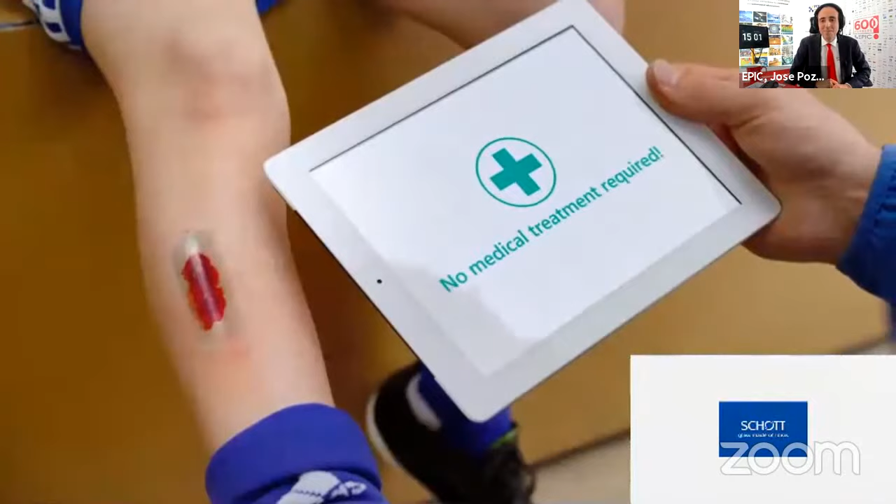With smart glass, you can collect information and display it where it's needed. All the new upcoming applications of glass have something in common: they have to be perfectly smooth, scratch-proof, and with added functionality to detect your fingerprints or send something through it. So we need to manipulate glass.

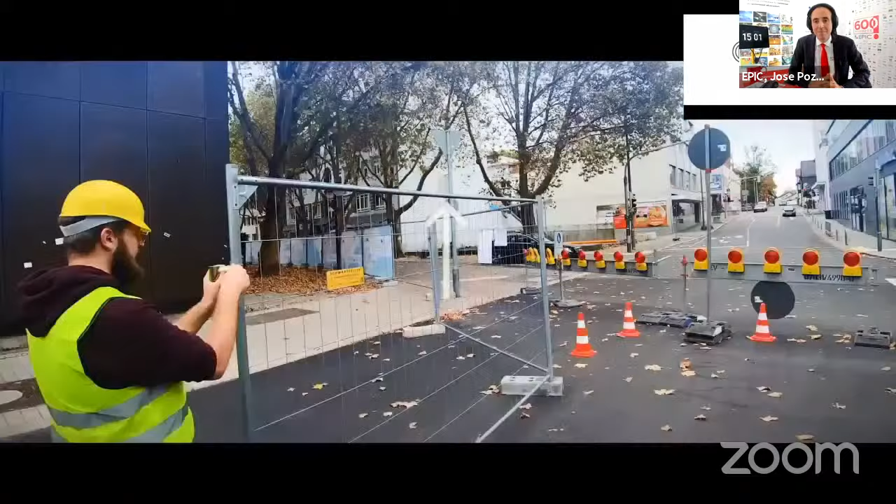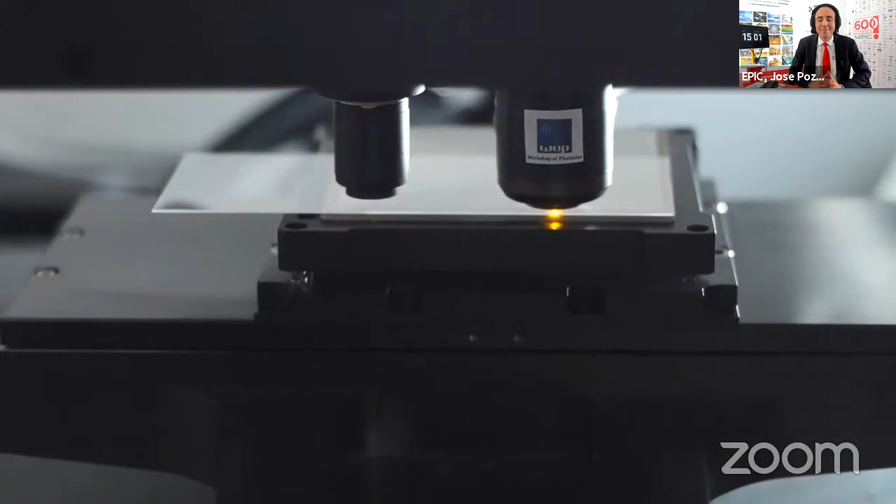Many industrial applications require joining glass to other materials like silicon, and that's where the specialized talents of EPIC members come in. Take Workshop of Photonics in Lithuania. They use ultra-fast femtosecond and picosecond lasers combined with extremely accurate optics to cut Corning glass. The high-end watch industry has chosen sapphire crystal as the material of choice. Sapphire can only be scratched by diamond, but producing and processing synthetic sapphires needs extremely accurate methods.

On October 12th, our Zoom room will bring together new and traditional end users of glass to discuss changing trends and new opportunities. I want leading companies in different application fields like Bosch, Swarovski, Huawei, Audi to interact with glass manufacturers like Corning or SCHOTT, and find opportunities for photonic companies including 4JET, Workshop of Photonics, OPTOMAN, Asphericon, Coherent or Ekspla. So let's explore business during our in-depth discussion on Monday, October 12th at precisely 3 p.m. Central European Time. And this time we promise not to scratch the surface.

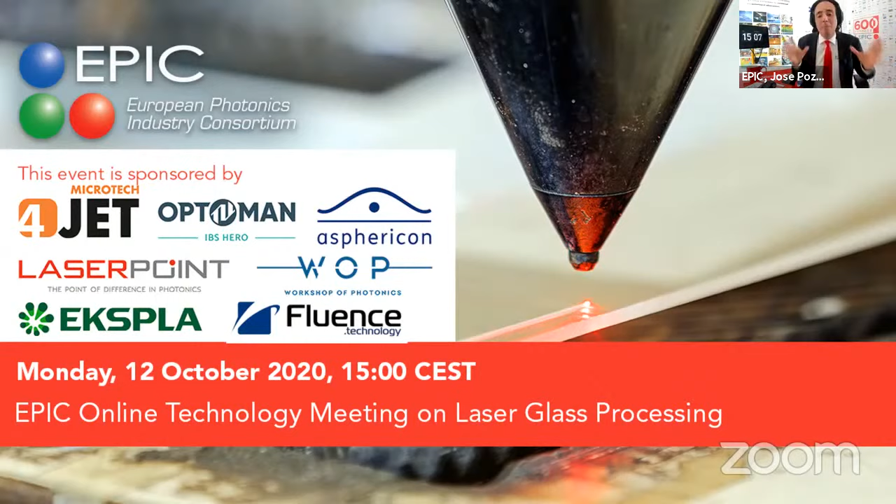But not only these people make me happy, the one that makes me the happiest is Dr. Francesca Moglia, who is gonna tell us what's gonna happen in the next 2 hours of your life. Francesca. Thank you very much, Jose, for the introduction.

So here you see, this is our agenda today. So we have a mixture of end users, system integrators, and also experts from the R&D side. But we prefer to see our agenda in this way, where not only the speakers are there, the official ones, but also all of you that are there. And so we heard already a bit about the sponsors that are also here, mostly coming from the manufacturing side, so from the supply chain. But we have also many end users.

So here on the top left, you can see we have different end users from different applications that are really looking forward to listen to what solutions we can give in laser glass processing. We have for them a lot of system integrators and experts in processing systems. If I read all through, it will take really long. So it's really nice that you are all here, we have really many experts today, and some of them are speakers. But if you're not a speaker, please raise your hand if you have some questions that we can talk about.

And then, of course, it's a laser glass event, so we cannot miss the glass manufacturers. So it's really nice to have here today 4 of them, some Epic members, some not Epic members. So it's nice to welcome new and old friends. And then, of course, the supply chain wants to listen to all of you. And so there are laser system engineering experts, optics, optomechanical beam shaping system providers, machines for glass, packaging experts, and also the laser glass processing of the future, as I like to call it. So research and development in this field, also many participants today from this.

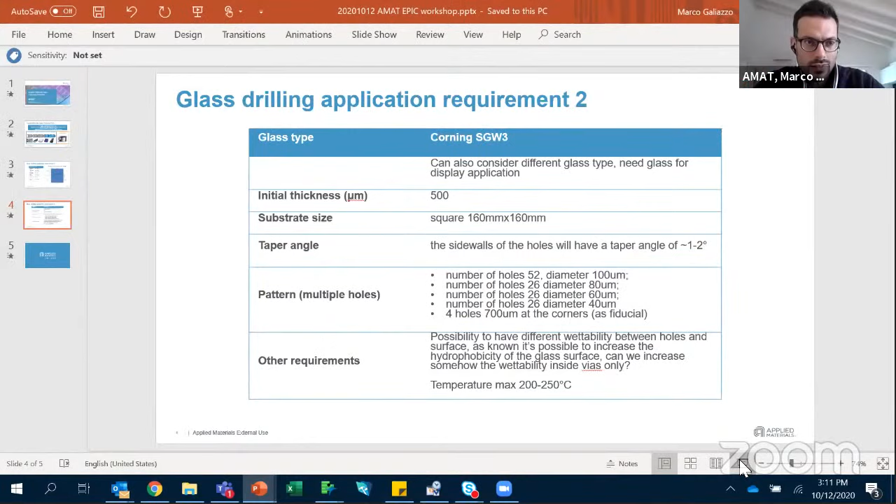What's it all about? So who am I? I'm R&D manager at Applied Materials Italia. We're based very close to Venice, so also a nice location if you want to come and visit, after COVID of course, you're always welcome to a very nice part of Italy. And I'm talking here as R&D manager. So I lead basically the R&D development for this company. It's a fairly old company.

Baccini was established in 1967, and he was a pioneer for automatic screen printing lines for microelectronics and PV. It was first in Europe to propose the technology, and his vision allowed basically to start a full industry in Europe. In 2008, this company, which back then had quite an impressive growth, was acquired by Applied Materials, based in Santa Clara, a NASDAQ big semiconductor company. Maybe many of you know this group. So we became a branch of this big multinational company, and we were incorporated.

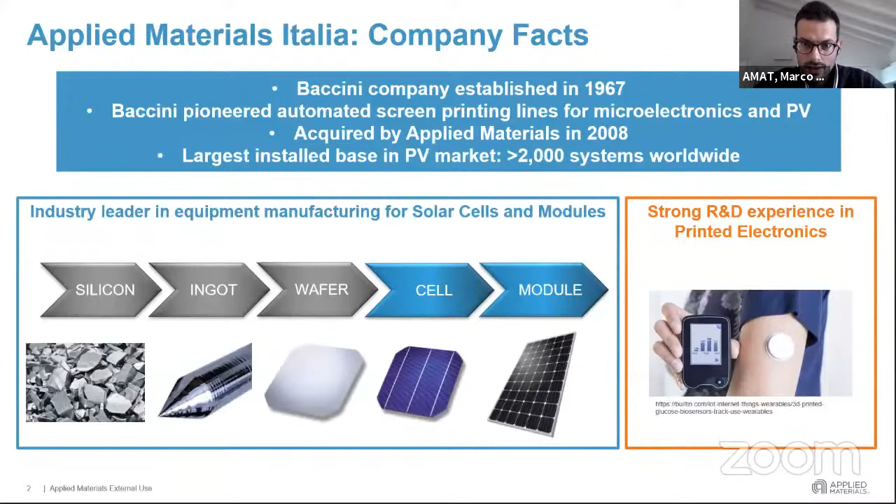So I came here with a wish list, so I don't have too many answers for you. I have more questions. I have two relevant applications, and both of them have a customer behind. We are mostly looking at equipment, so integration of laser into a full system, but customers come to us with requirements related to the final device or product. This is the first one, put in quite general terms so you can get a basic understanding of the process. We're looking at substrates up to A4 size, so maximum 300 millimeters by 200 millimeters. The thickness ranges from 500 microns to 1 millimeter. The via diameter for this specific application can be as low as 40 microns and can go up to 100 microns.

So the aspect ratio ultimately can go as high as 10, that is the thickness to diameter ratio. With the via distance, that can be from 100 to 300 microns. So this is an example of the pattern, and this normally would go all around the substrate, basically on the four sides, and this is related to some advanced display technology that big companies are now looking at. So it all adds up to around 3,300 vias.

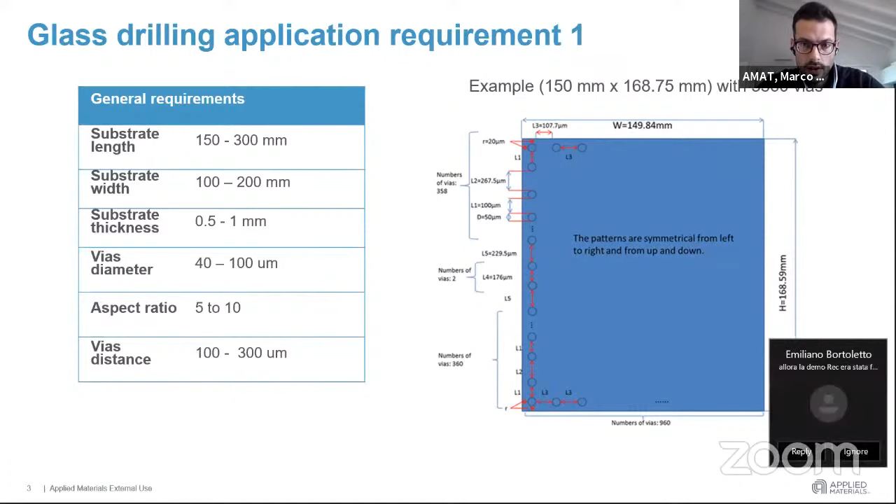I would say that for this kind of application, being still in an exploratory phase, we don't yet have tight requirements in terms of cycle time or machine throughput. So it's more of an R&D phase, and people now want to understand the highest quality they can achieve to build this device.

Okay. Another application: here we also have a specific glass we are basically targeting. This is the model, a Corning SGW3. Ideally, we are also flexible and open to different kinds of glass, but with similar requirements. Here, the thickness is set at 500 microns, and the substrate size is basically 16 by 16 centimeters. Here, the requirement on the taper is quite tight because the maximum taper should be between 1 and 2 degrees.

And this is a sample. We are currently doing some sampling for this customer. We have a specific layout of an array of holes with variable diameter. Pretty much the same requirements as before, plus, in this case, 4 holes at the corners with 700 microns. And here there is also an added requirement on our wish list, which is basically tweaking a little bit the surface behavior where we process with the laser. If we could ideally increase the wettability inside the vias, this could be a big breakthrough for this application, because we need to apply some materials inside these vias.

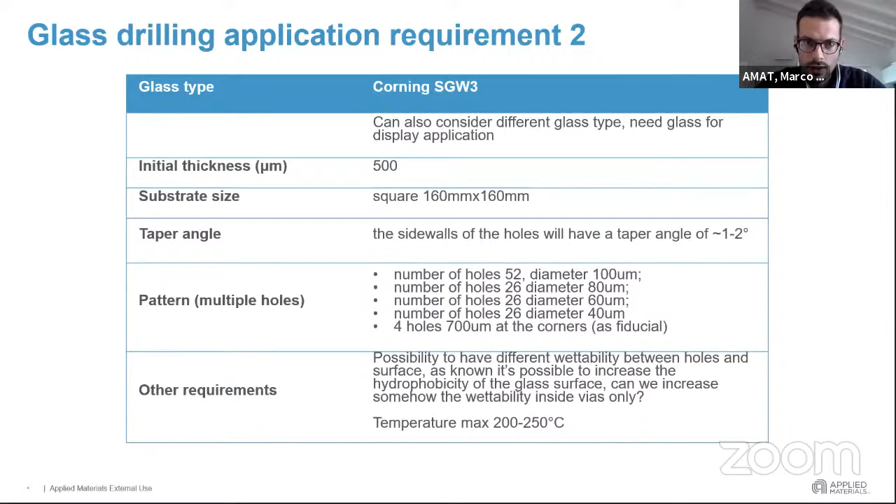And we have an additional requirement that also has to be met or understood. The full substrate should not go higher than 200 degrees C, because there are pre-deposited structures that can withstand only up to this temperature. I understand these can be fairly tight requirements, but I'm pretty impressed by the companies and names I saw in the audience, so I think somebody can knock at my door and help us in this journey. So thank you for your attention.

Thanks a lot, Marco. This is exactly what we like: specific data, specific information, specific requirements, so that our photonics experts from integrators and laser manufacturers can ask you something or go deeper into the request. I see now there is a question from Wilfried from SUSS MicroOptics. Wilfried, please open your microphone.

Hello, can you hear me? Yes, a bit quiet, but okay. Yes, I've had problems with my headset all day. Okay, but we can hear you. If we stay quiet, I shut up now. Okay. It's good.

So let me make a start and introduce myself and WaveOptics. We are a company designing and manufacturing two key components for augmented reality, namely diffractive waveguides and light engines. I'm senior manager responsible for waveguide development. A bit of the history of the company: we started trading in 2014. We're still a startup, but a large startup with 110 people. To date, we have raised in excess of 60 million.

And as I mentioned, we focused on manufacturing those two key components for AR headsets, which are AR lenses, augmented reality lenses, and small projectors, which we call light engines. So inside the company, we've got experts in different fields. We've got people specializing in modeling. We've got some in-house developed modeling tools. We've got manufacturing specialists, metrology specialists, and people focusing on the optical testing.

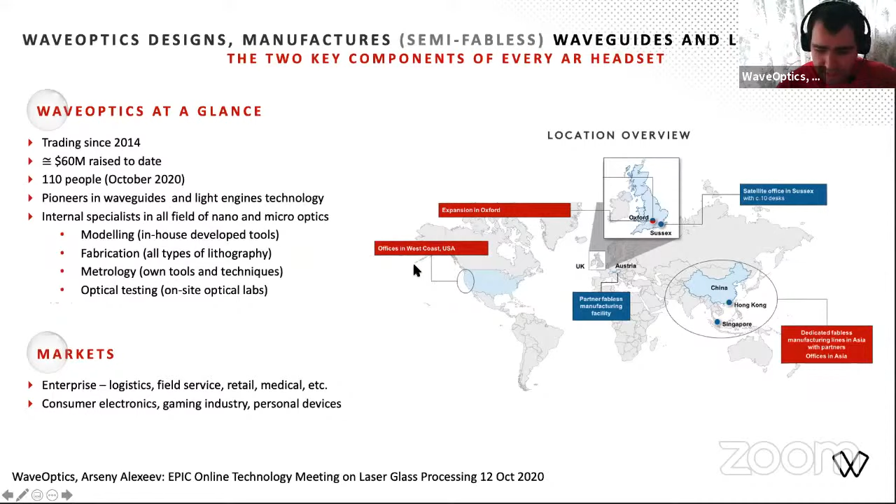And as you can see from this world map, our main headquarters are based in Oxford in the UK, but we've got business representatives around the whole world. So this slide shows our range of augmented reality lenses, AR displays. I'm probably not going to go much into details here, except to mention one thing, that we are producing 3 different products, and as you can notice here, they can be 1 plate, 2 plate, and 3 plates. This means that, for instance, for our 3-plate design, we've got 3 waveguides which are individually cut, and they are stacked together to form the final product.

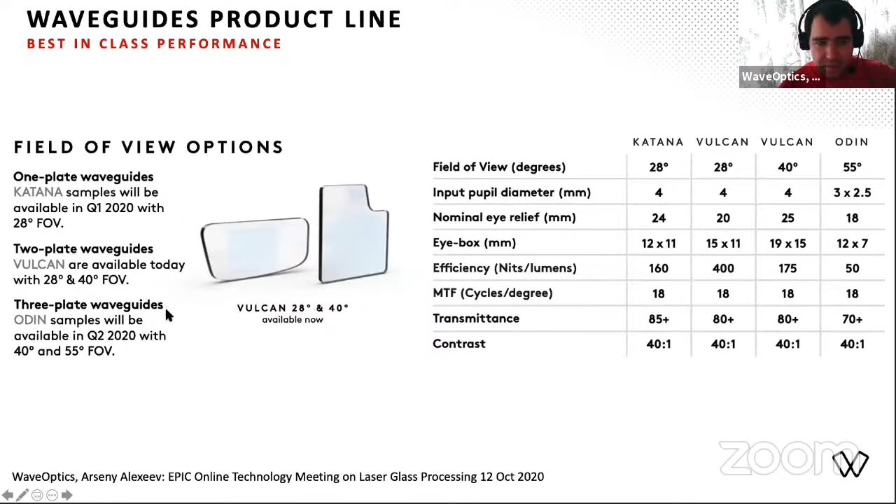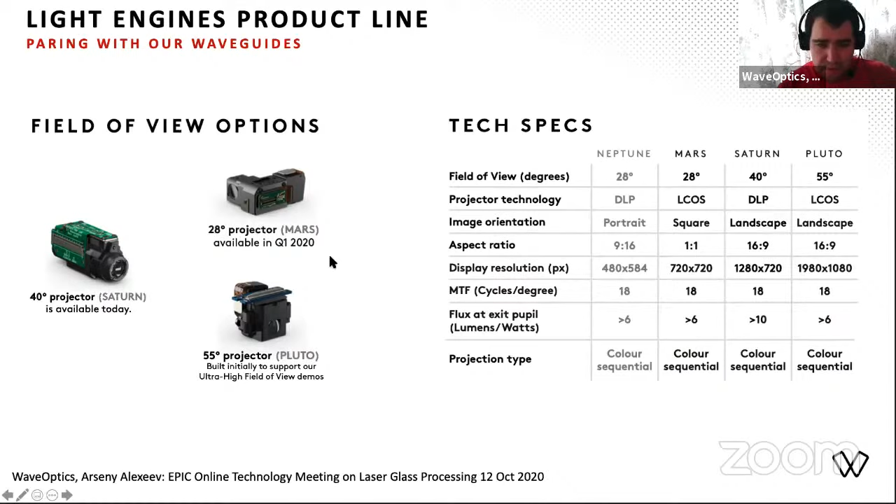So moving on to the next slide, this is a similar slide just showing the range of light engines, which are small projectors, which we're also manufacturing. This product is not that much relevant for this meeting, so I'm just going to skip this slide and move on. And on this slide, you can see our full manufacturing cycle, and I will spend a couple of minutes just discussing what is on this slide.

So the way we produce our diffractive waveguides is by using nano-imprint lithography. So it starts by imprinting diffractive nanostructures onto large 300 millimeter or 200 millimeter high refractive index wafers. After the imprinting is done, we apply some optical coating, and now comes the relevant part, which is laser cutting. So we are using lasers to cut out individual lenses or waveguides out of large glass wafers.

After this, if it's a two-plate or three-plate design, we assemble them together. So we attach one piece to another. After this, we apply edge blackening. So this is a blackening material which is applied at the edge around the perimeter to absorb the light which is escaping the waveguide. And finally, of course, we test them.

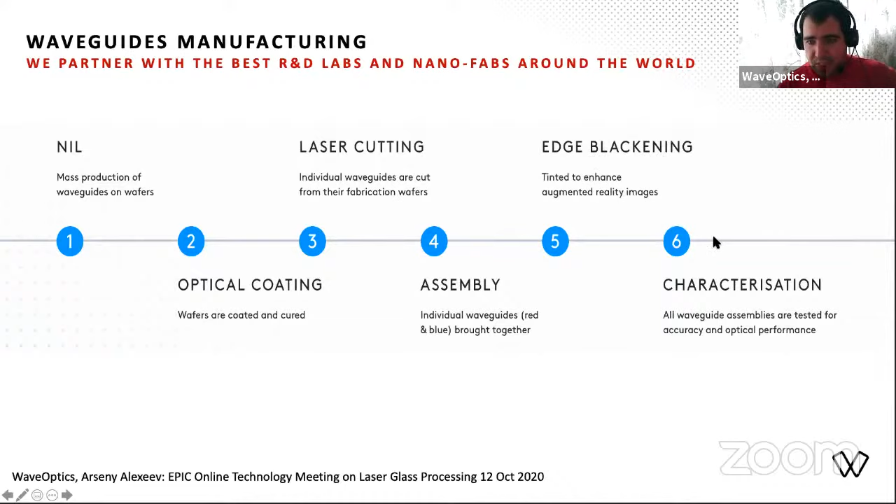This slide shows in a bit more detail our assembly process. So, as mentioned, we start with individual waveguides which are cut out of large wafers by laser cutting. And then we stack them together using an adhesive tape and applying some pressure. So we press them against each other and the tape works as adhesive material. We repeat this process to add cover glass, and finally we jet dispense blackening material at the edge.

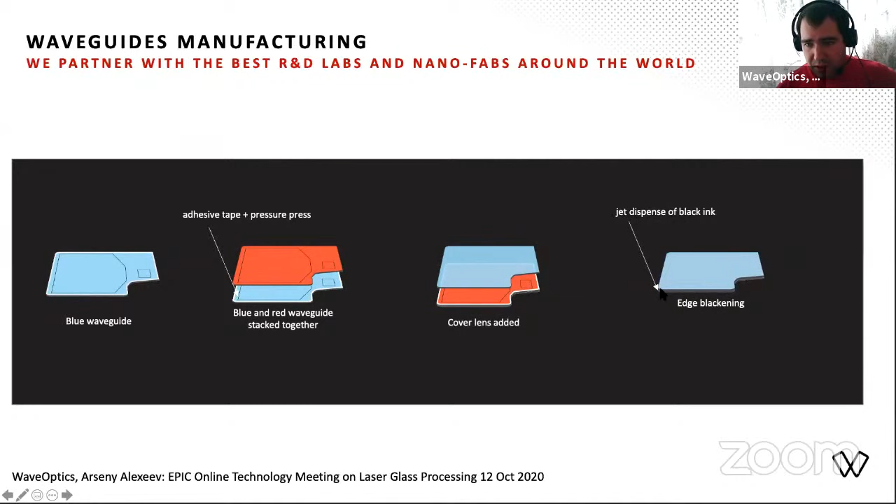So we are open for this kind of co-development collaboration, because what we find is that many solutions which we're introducing are very challenging, and it's not like we're getting them off the shelf, but sometimes we are working closely with external partners to create something new. And of course, for our customers, we offer our products, which, as mentioned, are waveguides and light engines.

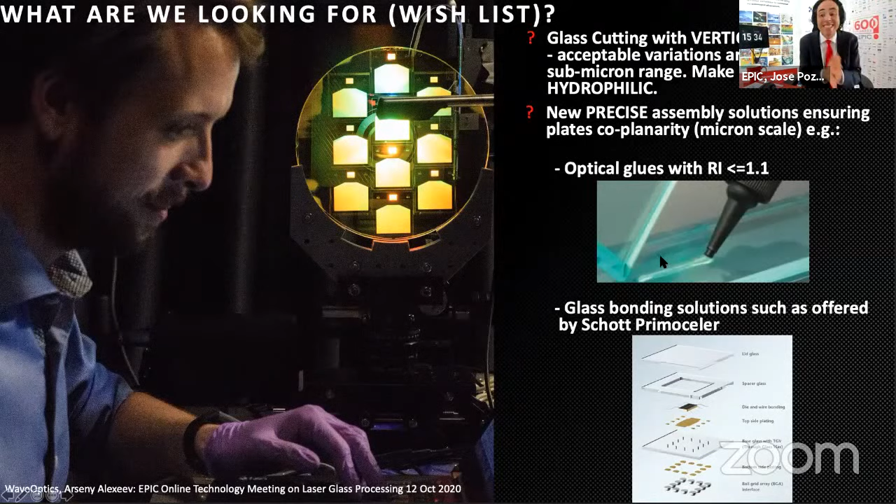We are looking for glass cutting with vertical sidewalls, with micron, even sub-micron range tolerances. And the surface has to be hydrophilic, as we just talked about in the previous presentation. We are also looking for partners on the precise assembly. So let's find you partners, collaborations, and potential customers.

We have a question here coming from 4JET. Marc, what's on your mind? Yes, hi, thanks. My question is, what kind of optical surface quality do you expect when the surface is made hydrophilic?

Thank you for this question, Mark. Actually, optical properties — there are two solutions for us. We either need the surface to be absolutely flat and vertical, in which case we don't need it to be hydrophilic. But if we want it to be hydrophilic, then optical quality of this first surface doesn't matter.

Okay, and what type of glass are you using? Is it fused silica? We're using high refractive index glass from suppliers like SCHOTT and Corning. I don't actually know the details of this glass, but I assume it is a highly doped, specific flint glass. Okay, most likely.

I have another question regarding the cutting edges. You were talking about the vertical cutting edges, right, that you expect when you cut the glasses from the mother piece, whatever that is. Have you thought about laser filamentation here, or what type of cutting are you using so far?

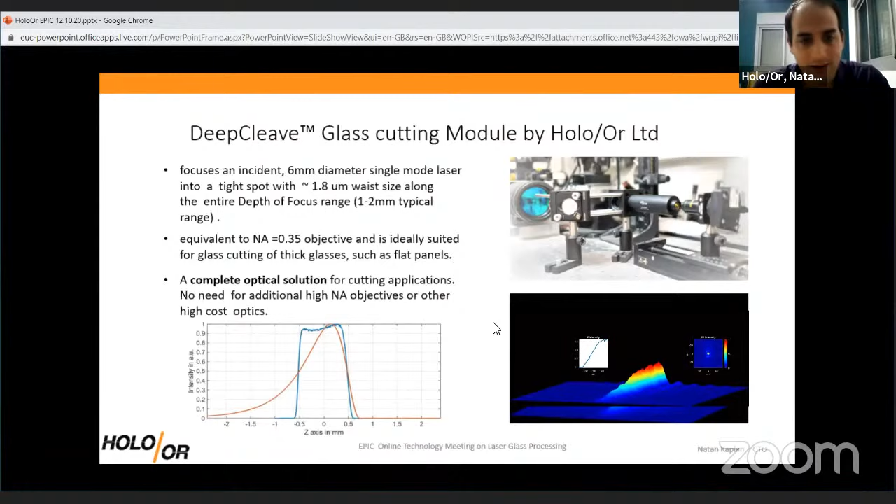So one of the ways to get this nice filamentation cutting in thick glasses while keeping the focus very thin and narrow, can be 3 microns, is to do it with ultra short pulses at around the 1 micron regime, and use special optics for cutting, such as our deep cleave, that can give you easily - this is for 1 millimeter in air, but in glass it would be 1.5, and we can easily design for 2 or whatever is needed. Using this in some sort of finishing process, it's quite easy to achieve a large depth of focus cutting. So basically, we are looking for partners to test it with, so we'd love to help anyone that would like to develop the process, for example, for waveguide.

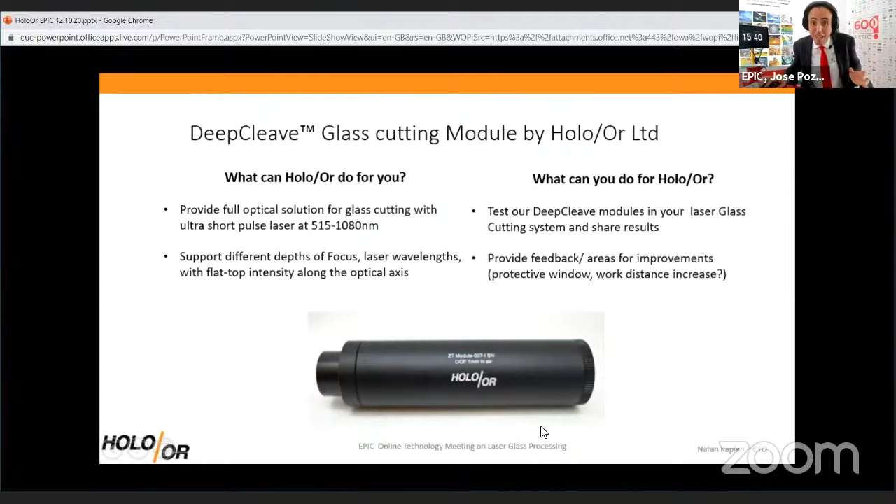Thank you, Jose, for this opportunity to speak. Thank you very much, Nathan. Thank you for joining the meeting. Whoever is looking for a partner on making an instrument with diffractive optical elements, you need to go to Holo/Or, because these guys know what they are doing. It's great to have Nathan with us, it's great to have also WaveOptics. Arseny, many EPIC members are contacting you, interacting with you, benefiting from your challenges. This is what we want, because WaveOptics is one of the success stories of the European ecosystem. Bringing nano-imprinted optics to the consumer market was a huge challenge, and you are there, you are doing it, and you make us proud. So Arseny, once again, thank you very much for what you're doing for photonics in Europe. Thank you, Jose. I think it's time to continue, Arseny, because we are going to have a lot of companies, one of them, for example, Primoceler, mentioned in your slides, that can help you with your support.

But first I go to Lithuania. I go to Workshop of Photonics. It's one of the places where I enjoy the most when I visit companies. Thank you very much for being with us, Workshop of Photonics. The chief research scientist, Antanas, is here to help us build a laser for glass. The floor is yours. Thank you, Jose.

Very briefly about who we are, self-introduction. We are a privately owned company located in Vilnius, Lithuania. We work together with R&D institutions, universities and industries, and we developed our own technologies, and we also take licenses from other technologies. That's why we have the possibility to use 9 dedicated femtosecond laser setups for fabrication of glasses and so on. A couple of years ago, we started using wet etching along with laser fabrication. Recently, we were certified on ISO 9001.

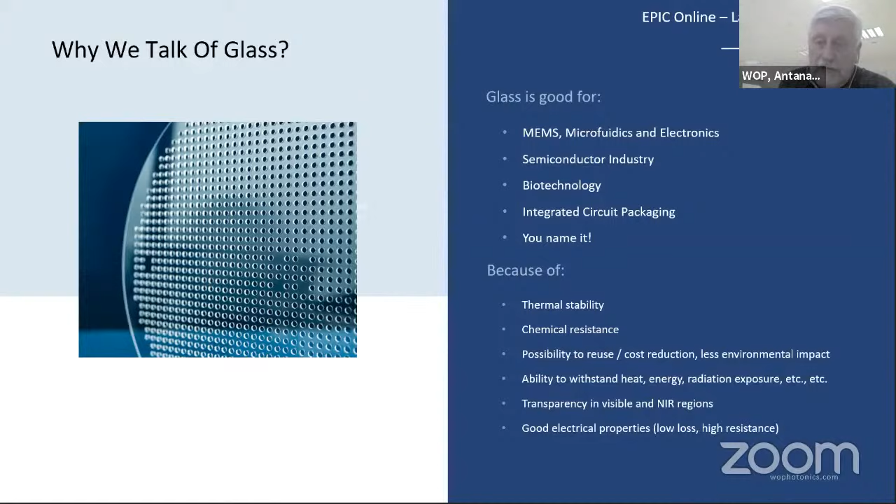Very briefly, what we can do - and I will try to comment on this video. This is forecasting Jose's question about what we can do for the community. So all this is yours if you need it.

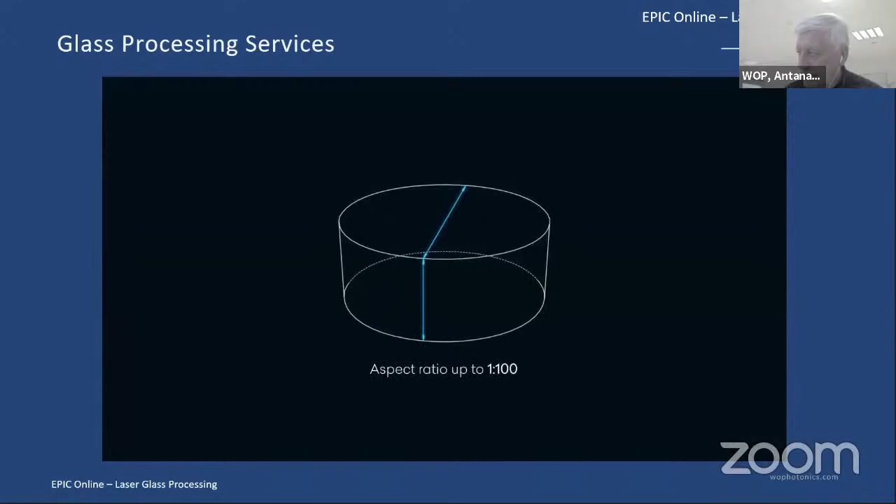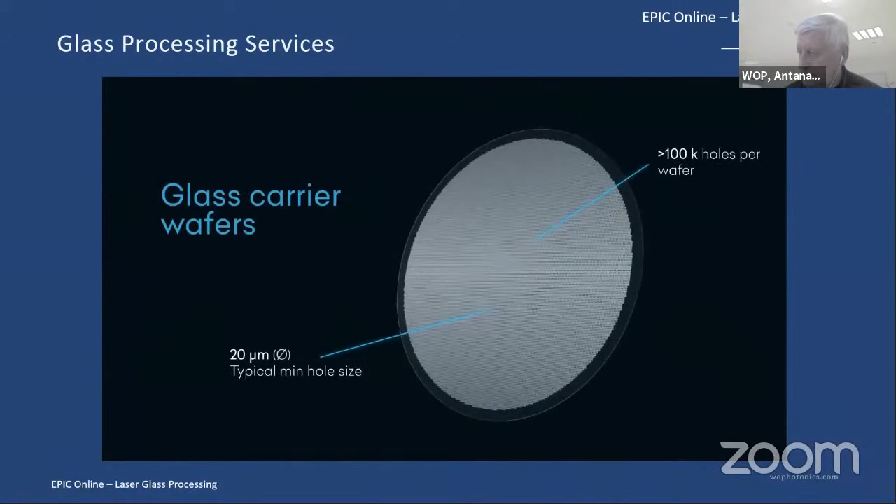As you can see, we can handle the tasks from the first speaker. We do a little bit more holes per wafer, and even a little bit smaller.

So how do we do this? As I mentioned, it is dicing, scribing, ablation, laser and etching. I promote at any opportunity, on EPIC meetings and other meetings as well, to think out of the box. You can use glass instead of very many materials. Here is one example of alumina ceramics replaced by glass. You can see the quality of the hole in the ceramics, which is used as part of the pogo probe. You simply check what you need instead of that ceramics, depending on what is important for you. You choose the glass and you get it, and you get much better quality than you can do by ablation of ceramics.

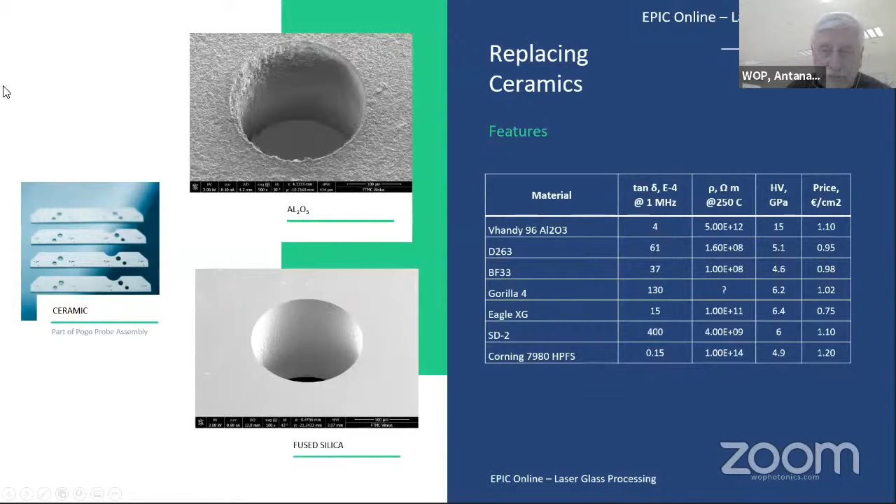But this is not only holes we can do in glass. Here are some examples of what we provide to customers who come to us with their problems. You can see skewed channels in the glass cube.

We can make a sandwich of 5 glasses for microfluidics with different channels in each layer, welding the glasses, all 5 layers together. And here is an example of a microchannel area for positioning of fibers.

You have to make it conical to make it easier for a 120 micron fiber to come in. This is top view, and this is bottom view, and here is the area for irradiation or something. I don't know what it was used for, but we can make it like this. Not very easy, but we do it.

So if someone decided to go for glass, just know that you have a partner ready to develop a process technology for you. You can get a lot of what laser and wet etching or just femtosecond laser can do with glass. And before you go to volume production, we can provide you this contract manufacturing service, up to 1,000 pieces of 8-inch wafers per month.

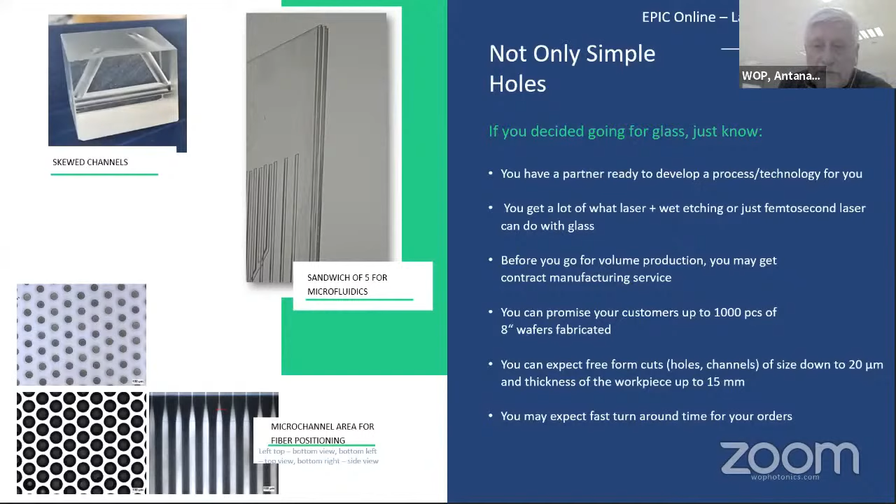And you can expect all these nice things you saw in the video on your product, with quite quick turnaround time. And if you need, we can provide you with a light engine to make your process in your own facilities. We can also provide you with laser machines that enable the processes we develop.

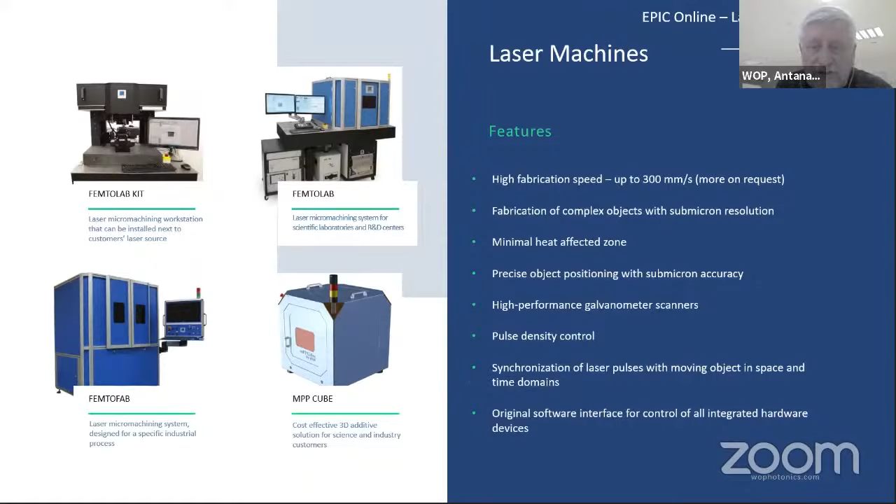So that's it, I almost fit in 6 minutes. Very good, Antanas, thanks a lot for your presentation. So you have now a very good excuse - you showed us a video so that you didn't talk too much. So now we have to make you talk more.

Okay, now we heard already from some end users so far some requests. You commented already a bit about it, but we left Wilfried basically without an answer. So can you comment again about whether it's possible for you to drill without debris, if you can disclose your tricks? Otherwise, don't, and speak with Wilfried.

It is no very special tricks. Usually you do this either with wet etching or with ablation. If ablation, this means debris - you cannot avoid it, so some particles will sit down on your surface. But with wet etching, it depends on what coating you don't want to damage.

So Wilfried, it would be good to know - what is on your fused silica? If it is not very sensitive, let's say, to alkali etching, then we can do it very clean.

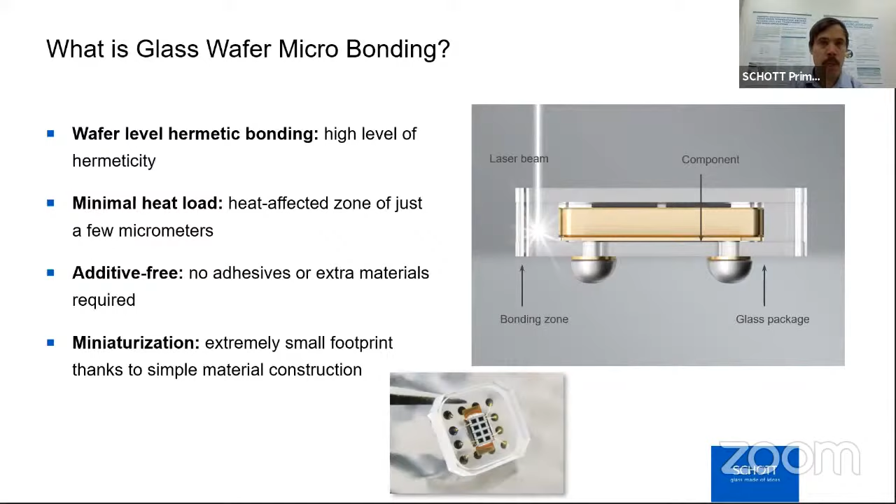But thanks to SCHOTT, we are now taking further steps. In the past few years, we have developed the technique for volume manufacturing. And at the moment, we are focusing on wafer level processing. Maybe you can see my cursor. So what I'm showing here: we are building up stacks of glass, or glass and silicon, and bonding the wafers in wafer form.

And why we made this decision is that we can then use standard processes from the semicon world, whether it's thin film coating, someone mentioned AR coating, or metallizations. So we can apply the standard processes for many steps and introduce our bonding method. So we stack up wafers. We can put electronic devices inside the glass. Sometimes, of course, the devices do not need to be active. There were many companies doing micro-optics or diffractive optics here, so we can have passive elements also in the stack.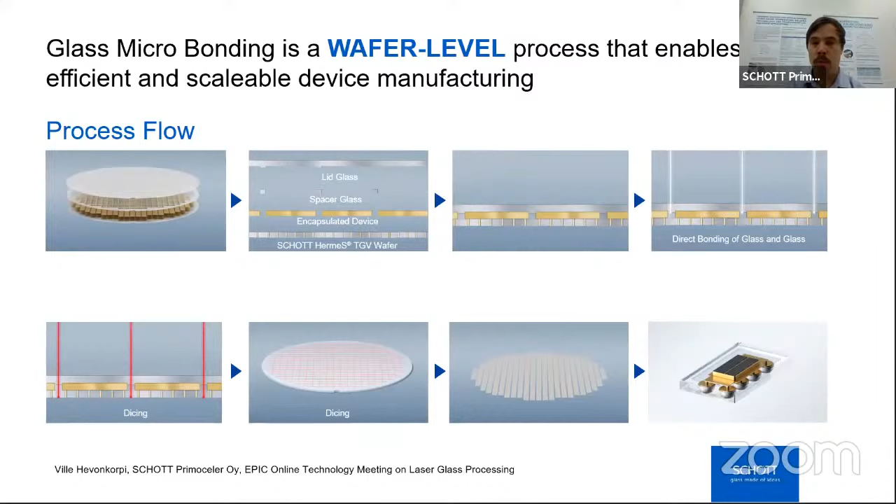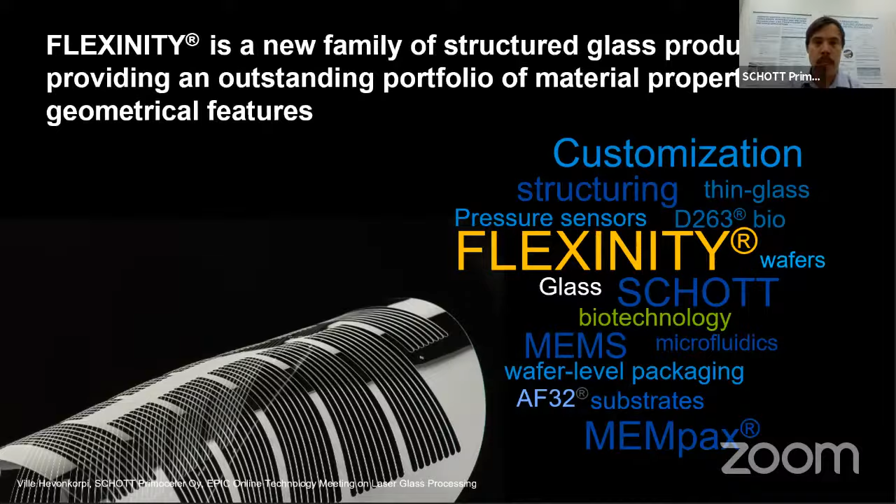And just a side note: for high volumes, our colleagues have also developed a technique to do glass structuring in wafer form. So if you need higher volume, precise glass structuring, you're more than welcome to contact me or our colleagues. So if you need spacer wafers or cavity glasses or camera lenses, please feel free to contact us.

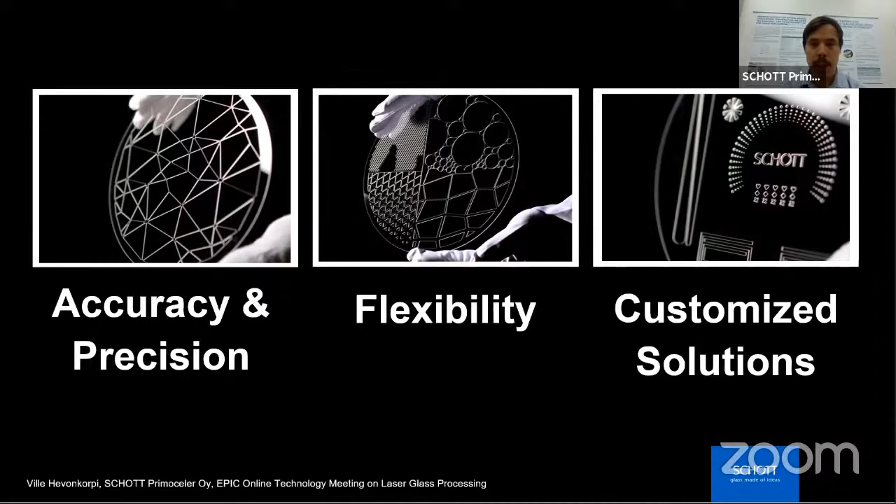Thank you so much. When I see the progress, the success, because we know each other already for many years before Primoceler was acquired by SCHOTT, when I see how you are helping the industry with key innovations and what you are doing with the company in the implants on the eye, this is quite amazing. And you are one of the reasons I'm happy every morning when I have to do this kind of job. Thank you once again for what you're doing.

We have questions for you. And the first one is from the Photonics company of Europe, I put Osram like that. Roland, what's on your mind? Yeah, hello together. So I'm interested in regarding both surfaces. If we bring both glass surfaces together, what are the requirements for roughness, smoothness of the surface of both glasses so that you can do the joining with your Primoceler process? Do we need additional polishing or can we use glasses which come from the suppliers directly? What are the requirements for the surfaces?

Yeah, so the beauty with the glass wafers we have seen, we have I think 4 manufacturers were mentioned already today. So we can use standard polished wafers. So there's no need for any higher polishing. Okay, sounds good. Thank you.

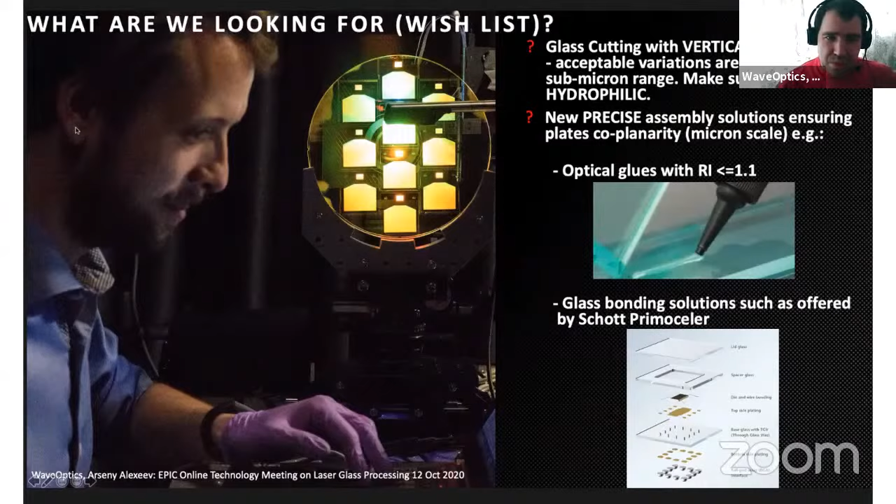Yeah, I'm pretty sure we can help you, and this is one of the reasons we are part of EPIC. So actually, it was like half an hour ago, I got a calendar invite to have private discussions with you. So that's why we are here.

We have even, of course, questions in the YouTube universe for you. The first one is from a company in Denmark, NKT Photonics. They make fantastic supercontinuum lasers and fiber lasers, and Hussein Iman saw your process, and he can ask you the EPIC question: what is your wish list on lasers? What laser are you using today? You could specify a bit, and if you could have any laser in the world, what would be the dream laser that you would like to have?

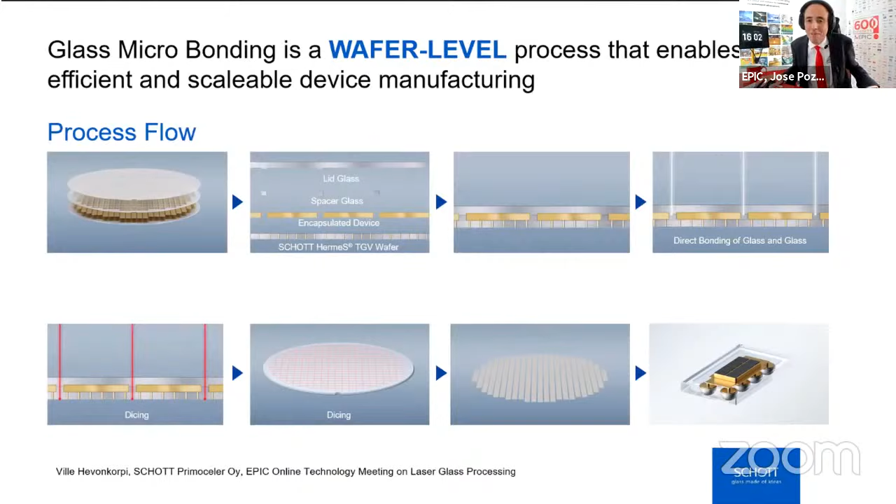To be honest, we are quite fortunate to be located in Tampere, so the optics research here is rather extensive, and for the moment, I'm not sure if I'm speaking on behalf of all our R&D engineers, but the light sources at the moment are on a sufficient level, and this is the beauty. The technology in the light sources is already really industrial, and lasers can be used in industrial processes without having to tune them every day or even every week or even every month.

Further questions. The first one is from an entrepreneur in stealth mode. He doesn't want to say the name of his company, but he's asking, this is a big business opportunity: can you do bonding of glass and plastics?

So plastics, I would say that the short answer would be no. If we are to melt the glass, the temperature is such that the plastics in general would evaporate already. Of course, it depends. There are many kinds of plastics, but the general answer is that, sorry, this is one thing that we probably cannot help with.

All right. So one thing, Ville, we are living now the era of micro-optics. This is the revolution of micro-optics. I see companies that are really booming in this field. Many of them you have heard already, from EVG, from WaveOptics, from micro-optics and from NILT. And they are really developing technologies never seen before. In Europe, CSEM is making a big difference in bringing all these companies together.

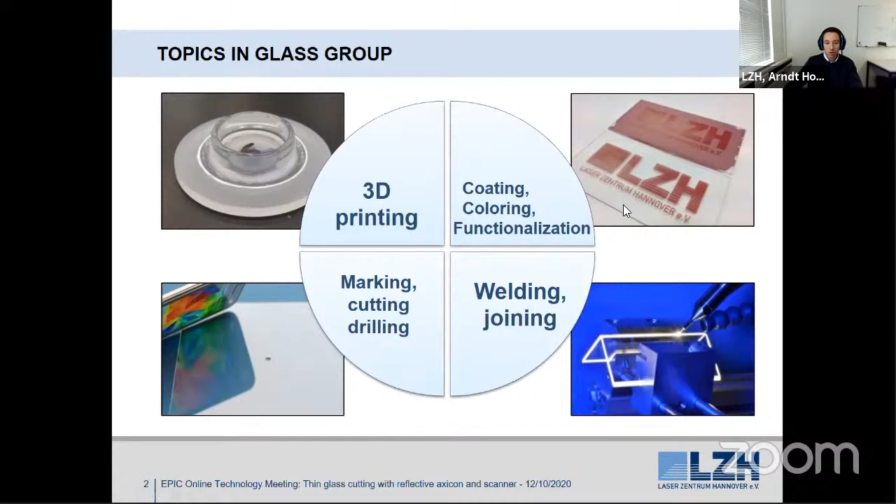We're at Laser Center Hannover. Maybe you know this already. Glass is used in a very wide range of applications, displays, electronics, architecture, of course, for thicker glass boards, and even other applications where you have high temperatures, corrosive environments, and so on. So when you talk about glass cutting, you concentrate on the chipping, the stress, and the surface roughness.

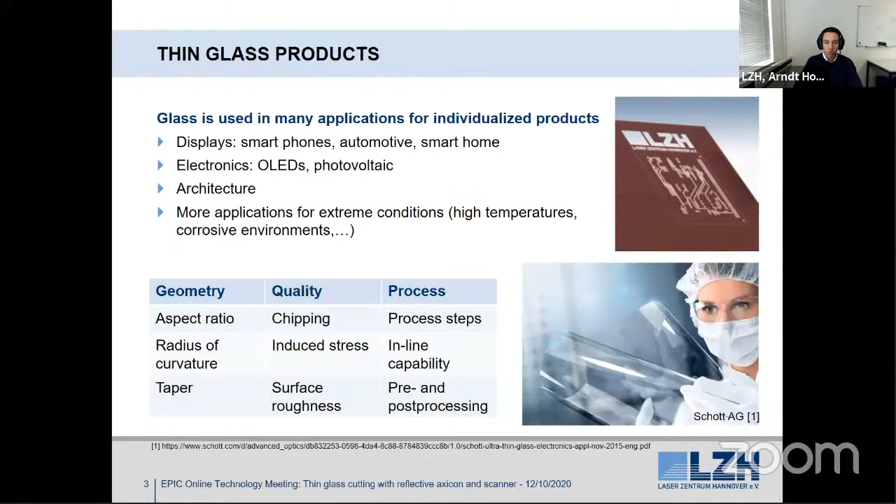Here we did a collaboration together with asphericon, and they're producing a reflective axicon. An axicon transforms your incident laser beam into not only a very fine focus, but you can use it also for an elongated focus. So we can elongate the intensity profile to process even flat glasses with a very constant intensity profile. And of course, the conical shape on the top generates this transformation, and you have interference effects, and this leads to this elongated beam.

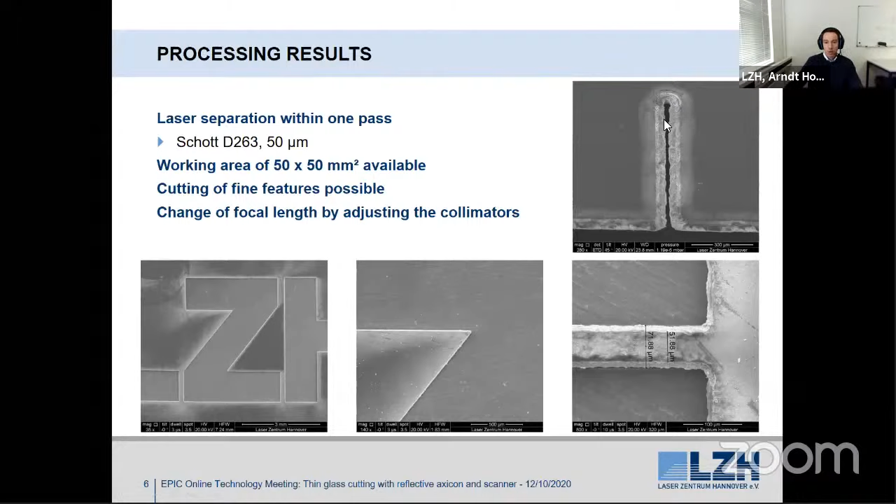Maybe one more detail. We can adjust the focal length by adjusting the collimators. So here we adjusted it for the thin glass, but we also want to adjust it for thicker glass as well. So thank you very much for your kind attention.

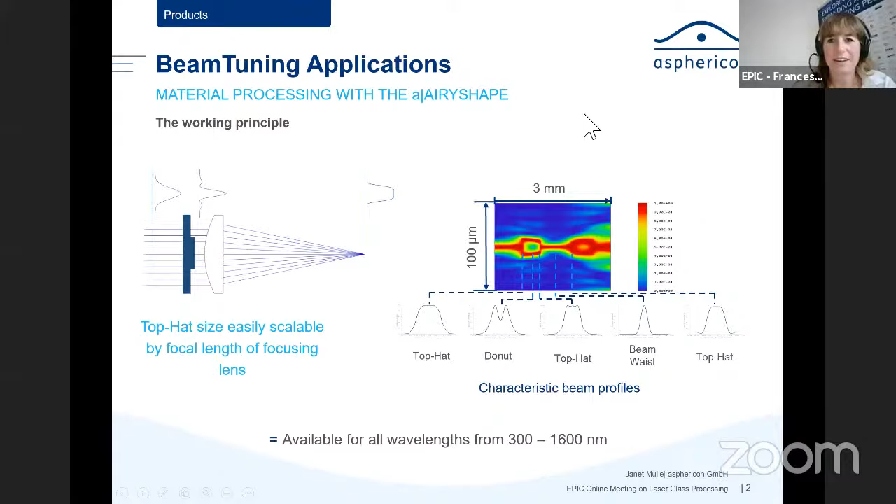So if you didn't notice, in the chat and on YouTube, everywhere, we are asking about, Jose put the real clear question, what is the biggest challenge in glass processing? And now we have the first hint from Natan, so you have 30 seconds to propose it.

Okay, so at least from what we see from our end users, a lot of people try to cut using scanning methods. As usual in all material processing industries, scanning is best because it gives the highest throughput and most flexibility. The problem is when trying to use filament cutting in some self-dicing processes, like usually used to cut thick glass, you need high NA. You need to focus it down to 3 microns, 5 microns, something like that, and you can't do that with any reasonable scanner. We don't have Sill here, I think, but even the best F-thetas don't reach that. So right now the industry is limited to moving the stage in XY, but I don't know if it can go on like this with high throughput - someone needs to solve this somehow with some very fancy focusing optics. So that was one of the challenges that we see all the time. We solved it for the XY movement with the deep cleave, but someone needs to solve it also on the side of theta, let's say.

That's a good challenge, thank you. If someone wants to comment already about this, do you agree? You have solutions? You don't want to tell Natan because you don't like him, but now you should like him - tell him. No, I mean, if it's not the case, anyway, think about it and we can keep this on our wish list. This will be put in stone forever for the future, so it won't be forgotten.

Today I'd like to discuss two technologies: Bessel beam scribing and laser-based rear side machining. I would like to compare these with conventional technologies, for example mechanical scribing, diamond saw cutting, water jet cutting, or polishing. So maybe briefly about these technologies.

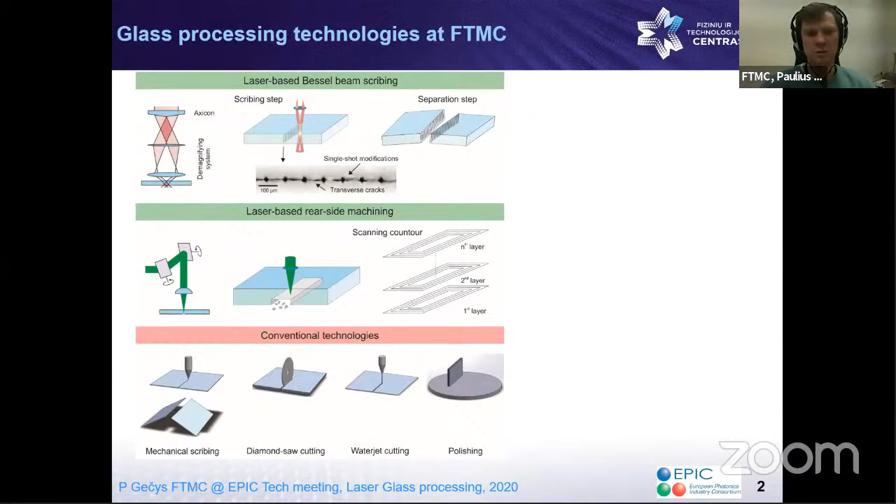As for Bessel beam dicing or scribing, we already heard some talk about it. Basically, what you need to do is perform some elongated modifications inside the glass along your desired cutting path, and then apply some mechanical load to separate your samples. This is a really fast technique in terms of dicing speed.

But it also has some disadvantages. For example, it can be applied only to low curvature cutting contours. That means you cannot really cut narrow holes and so on.

The other technique I'd like to talk about is rear side machining. This is a really flexible technique. You focus your laser beam through the glass sample to the bottom side, and by scanning the laser beam, you can form a cutting path. Scanning layer by layer, you can remove material from the backside, mainly in particle form.

This is a really efficient process. It could reach up to 120 cubic millimeters per minute ablation rate, and what we tried today is cutting up to 19 millimeters thickness glass.

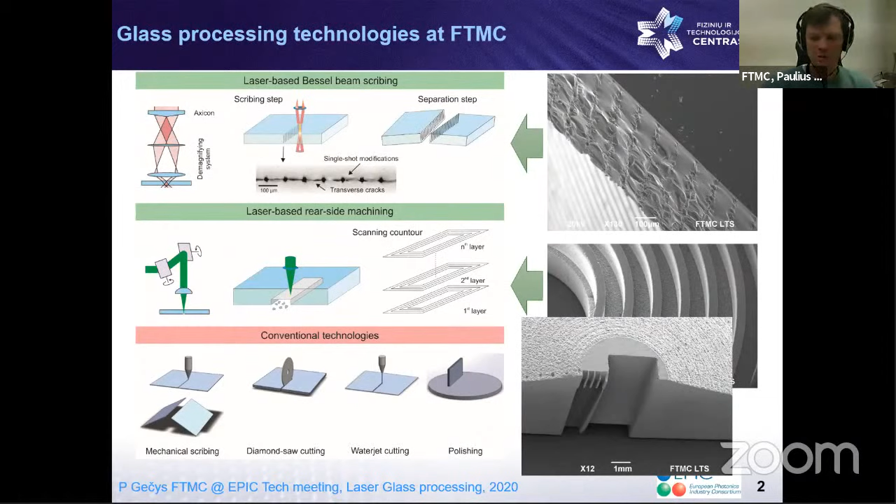Other advantages are that you can apply this technique for hole drilling, for through cutting, and for 2.5D milling as well. If you combine this technique with other laser-based techniques, for example laser modification and chemical etching, you can make really interesting things and really interesting components.

So basically, what we did is try to compare these two technologies with conventional ones, in terms of surface chipping, which I think is one of the parameters really important for industry, and other parameters like component failure rates and resistance to mechanical loads.

So we can go to some summary of our research. For example, if you're looking for a fast process to dice straight lines, in terms of laser-based processes, Bessel beam has an advantage. Also, from conventional processing techniques, you can apply the mechanical scribe and break method, which is really cheap.

For example, if you're really interested in surface chipping, again you may need to consider using bezel laser dicing or Bessel beam dicing technique, if you're interested in surface roughness.

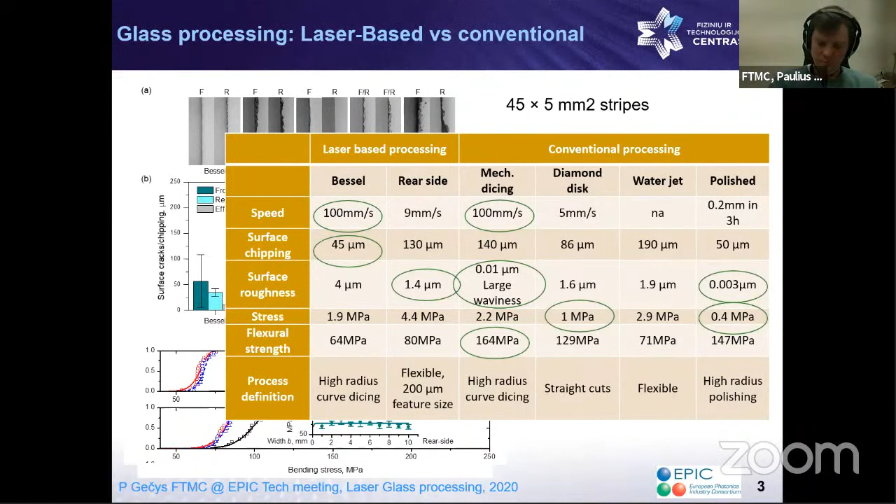So thank you for your attention, and I would like to mention that an in-depth analysis of all these things I mentioned you can find in our latest research paper. So thank you for attention.

Thanks a lot, Paulius, for your overview from the more research side of the technology. So now we have a question in the chat from Joris. I guess there were a couple of data points already in the last slide, but maybe Joris, you can ask again - I'm not sure if the answer was there because I missed it in the table.

So maybe you just ask. Okay, so the question was about glass volume? So it was 120 cubic millimeters per minute - this is now our maximum, 120 cubic millimeter per minute. Okay, yes. And this is with what kind of laser power? It's around 20 watt.

Okay, very good. So if there are - I don't see questions at the moment, we have many people here - but it would be nice for me to go on a bit with our introduction to all the audience that is sitting here. So for me it would be really nice now to introduce Guillermo from Guardian Industries. It's really nice to have you here, and maybe you can explain a bit what is your background, your interest in this meeting, so that we maybe can help you.

Now that's funny, it's not coming up, is it? Ah, here it is. Okay, so thanks a lot for the introduction. And actually, maybe I can answer some of the questions that have been raised regarding usage of CO2 lasers and so on.

4JET is a machine integration company, and you can see what we're doing here. A few words to that. We are not only in the tire marking and laser cleaning business, but also in the glass processing business, including thin film photovoltaics, where we provide large laser edge deletion machines to delete the edges of the glass and to free them from the photovoltaic layers to provide a bonding surface and so on. And we also provide laser cutting based on filament cutting and laser patterning solutions to different markets.

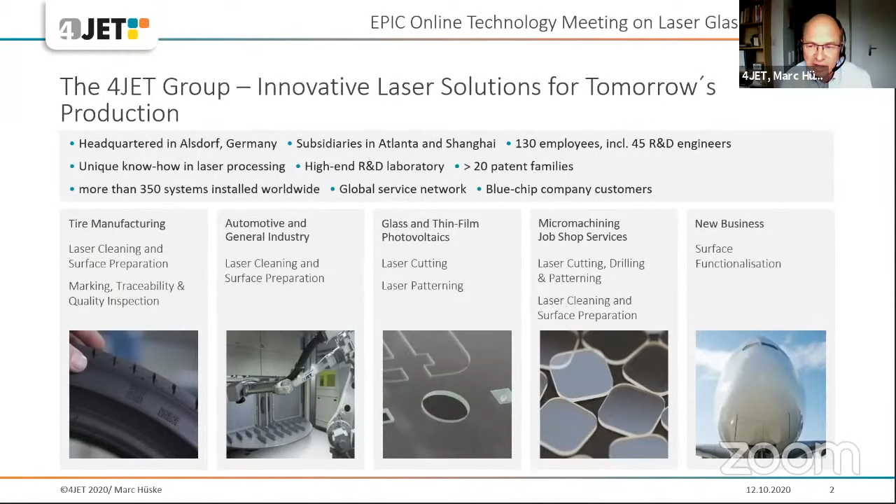We were seeing Guardian Glass. We have those large machines to be able to pattern or cut the large pieces of glass. To support our business, we also have a micromachining job shop service located in Prutting near the nice Chiemsee, where we provide especially laser cutting job shop services. So if you want to bridge the time between the PO and the commissioning of the system, you can rely on our job shop services. We are located in Alsdorf near Aachen. We have subsidiaries in Atlanta and Shanghai, around 130 employees, including a large portion of R&D physicists and engineers.

Now, we call it pearl cut technology, which is actually based on filament cutting to cut glass and achieve the perfect edge, which is a perpendicular edge where the filaments have been formed. And this edge is too perfect in some cases because it doesn't have a bevel at the edges. Anyhow, what we use is an ultra-short laser pulse. It's strongly focused, and the focus is elongated by means of special optical elements. A filament forms in the glass, so we have a chain of little microfractures along the propagation of the laser beam, resulting in ultrafine bulk modifications of 1 to 3 micrometers in the glass. And this is basically a weakening of the glass.

You can then use a stage to move this filament line along the cutting edge. Now the glass is weakened and you can mechanically break it, or you can use a CO2 laser to automatically separate the glass by heating it along the lines of filaments. This CO2 laser creates a temperature gradient transverse to the cutting vector, resulting in tensile stress, and then the glass separates automatically. This doesn't work for every type of glass. You need some value of coefficient of thermal expansion to make it work.

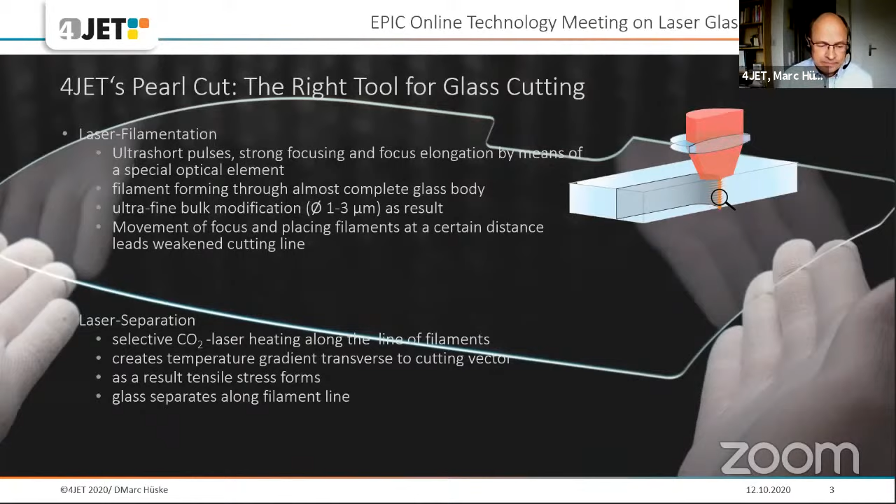The solutions that we provide are called Pearls, according to the pearl cut technology. On the upper right, it's basically a system that can be scaled in size based on a table where the glass is fixed. The table moves underneath the laser beam, and the stage moves the laser head across the surface of the glass. By using both motions synchronously, you can introduce any cut line into the glass. We can integrate different types of laser sources and filamenting optics. We have heard about Bessel beams and special optics we are using from Coherent, for instance. We are open, but we rely on products, and products need to be standardized to some extent. So we try to keep our suppliers to a small number.

The Pearl is ideally suited to support the backend mother glass approach in smart window manufacturing. Smart windows are those switchable windows where you can apply a voltage to the glass and the transparency changes from light to dark and vice versa. Those windows can be cut in the mother glass approach, meaning you get a very large piece of glass which you have to cut into small products. It can also be used to process ultra thin glass down to 30 microns and cut thick glass in architectural windows. And as I said, you receive the perfect edge with a very low surface roughness, a high edge strength and a very accurate contour.

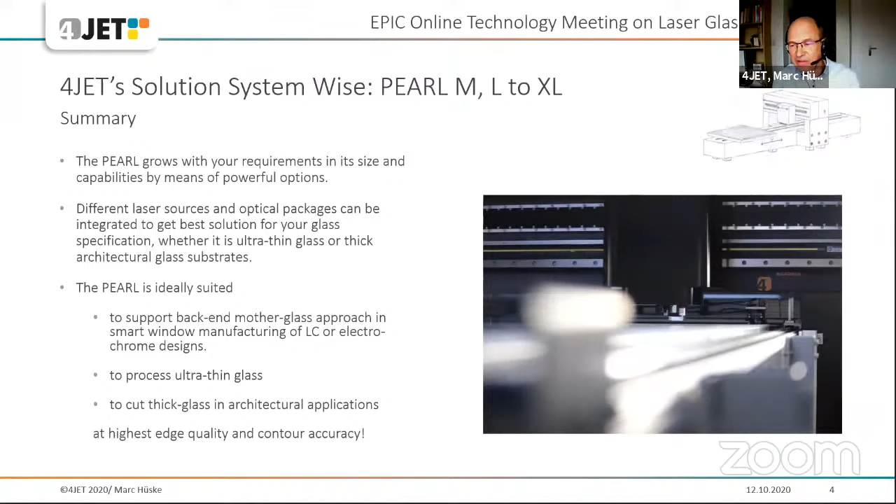Now let's come to the patterning. Most windows today contain some kind of coating, low-E coatings or active coatings like in smart windows, and usually those coatings need to be patterned to achieve, for instance, a bandpass filter for mobile transmission. If you're riding on a train, you would like to use your cell phone to talk to your friends, and the reception is bad because there's a silver-based coating on the compartment window shielding the glass. When you structure this coating, you can achieve a bandpass filter.

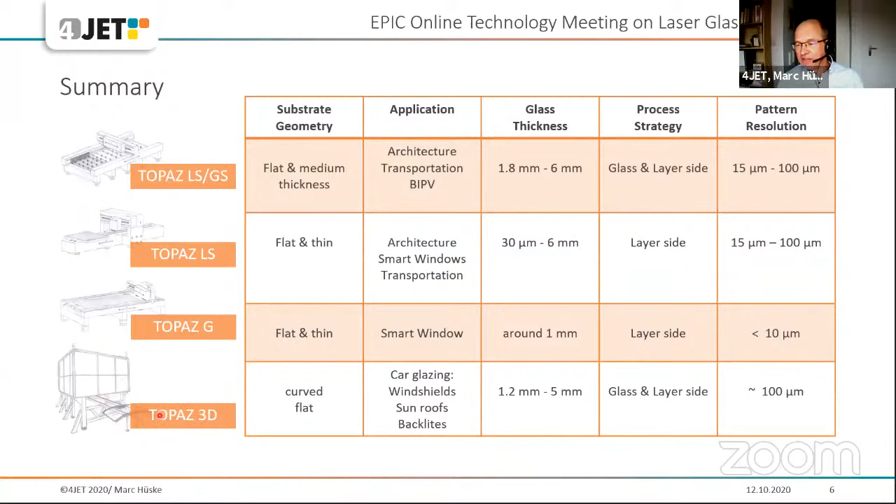For each of those different requirements, we provide a solution. If it's very thin glass, the Topaz LS is the optimal one. If you have photovoltaic glasses, the Topaz LSGS is the optimal one, especially if glass side patterning is asked for, which is usually more efficient and provides a high resolution compared to the layer side structuring. And then we also have a Topaz 3D, which is, as you can see here, made for windshield patterning. Coatings on windshields for heated coated glass, for instance.

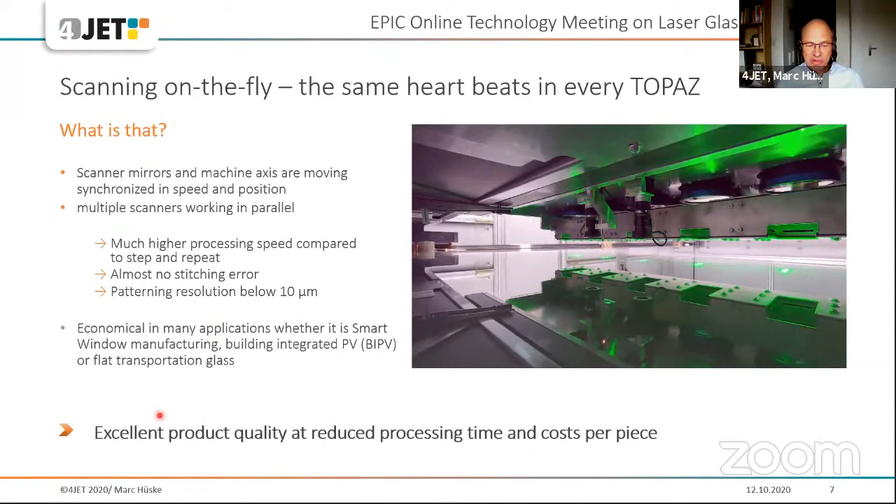The heart of the system, as you can see in the video, is always a scanning on the fly system. So we have a combined motion between the scanner mirrors and the axis moving the complete scanning head or heads, and you have 5 multiple heads working in parallel here. This provides a much higher process speed and almost no stitching error. In this specific configuration, we achieve a patterning resolution of below 10 microns. So it's economical, whether it's in smart window manufacturing, building integrated PV, or flat transportation glass applications.

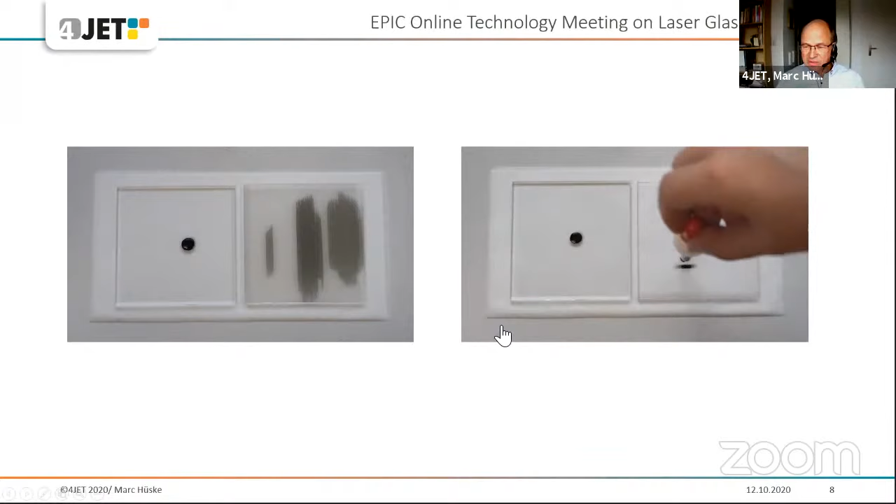So much for my presentation, and I'm happy to answer any questions and also to engage in some discussions later on, maybe afterwards or during the next days.

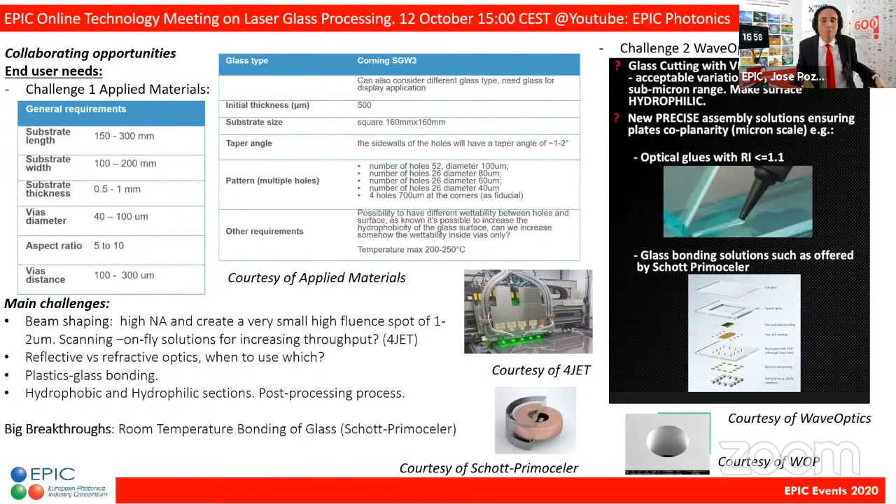If I had to choose what is the big breakthrough, the room temperature bonding of Primoceler. Ville is a success story for this ecosystem. I really cannot believe how much we enjoy and how much we learn and how much we can collaborate in 2 hours. It's about being efficient. At the end of the day, all we want is to make sure that all of you find partners.